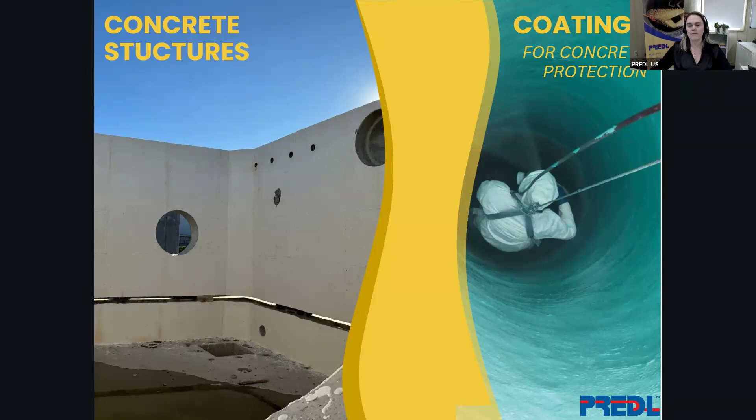There's plenty of evidence to show that in just a few years' time, bare concrete and coatings can and often fail. It's important to recognize that corrosion in these structures occurs not just above the line of sewage, but also below. We have this corrosion happening in two ways: one, bacterial hydrogen sulfide, and then the other, sulfuric acid. This process, as I'm sure a lot of you are familiar with, is often referred to as microbial induced corrosion, or MIC.

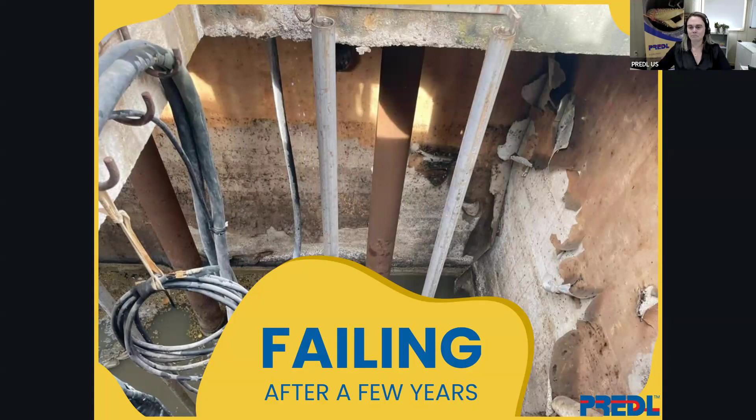MIC is a process in which sulfates in the sewage are altered by bacteria, causing the formation of hydrogen sulfide, and we're all familiar with that rotten egg kind of smell. Once this has happened, the sulfur is further oxidized and it eventually turns into sulfuric acid. So while many coatings have exceptional corrosion resistance, it's only as good as the technician who's applying the material, and if it's not applied perfectly, you can almost guarantee failure.

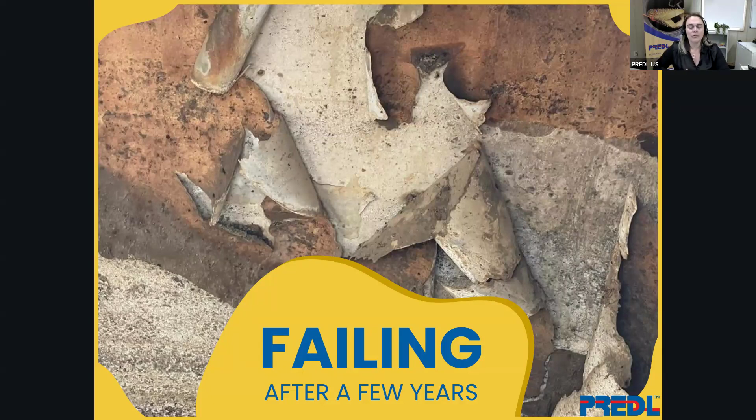In these larger structures, we find that the area in which the water level sits is often the most damaged. The issue we see is that there's this constant fluctuation in the height of the water line. So we're kind of encountering a dual attack: we've got sulfuric acid, we have hydrogen sulfide, but then we have this water level moving up and down, which is further eroding that weakened structure through the turbulence of the water movement and changes in pressure.

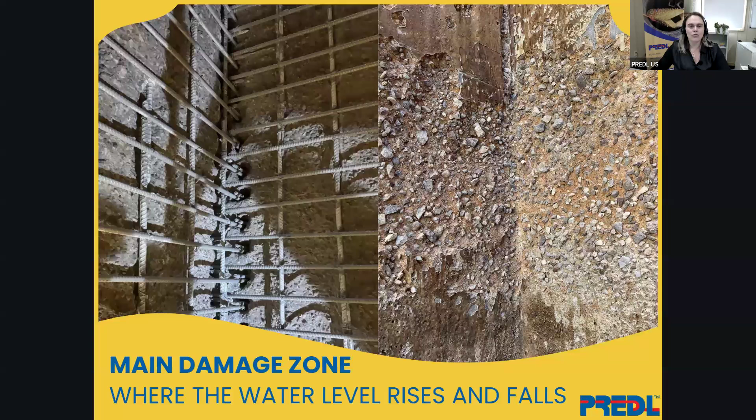So to repair this type of damage and prevent future corrosion, we really need a durable and robust rehabilitation solution.

Another situation that we see and hear of often is that people are lining only the part of the structure that they know will be exposed to the air. They feel that lining below the water level is not necessary, and that really is a mistake.

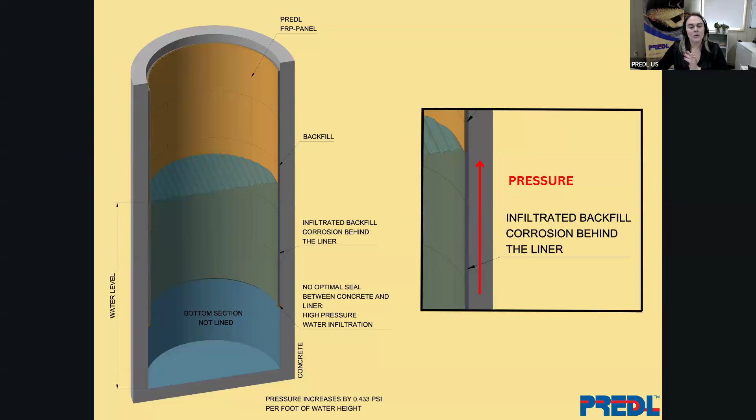If the bottom isn't lined, we can see here through this visual: if we don't have the bottom lined, we have no optimal seal between the lower edge of the liner and that structure. And with that, we can't guarantee that the lower edge of that liner will not eventually succumb to infiltration. Once that infiltration occurs, as these water levels go up and down in the structure, so does the water behind that liner, and it's leading to infiltration in that backfilled concrete.

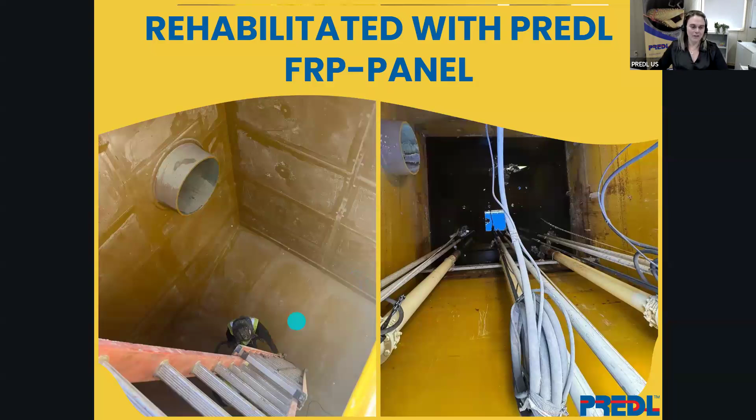So here you can see a structure that's been rehabilitated with Predl's FRP panels. Our panels are sealed from the floor all the way to the ceiling. This system is going to ensure that there are no future issues with back pressure over any lower exposed edges, because they don't exist in this system. So on the left is a structure immediately after install, and then on the right, a year later.

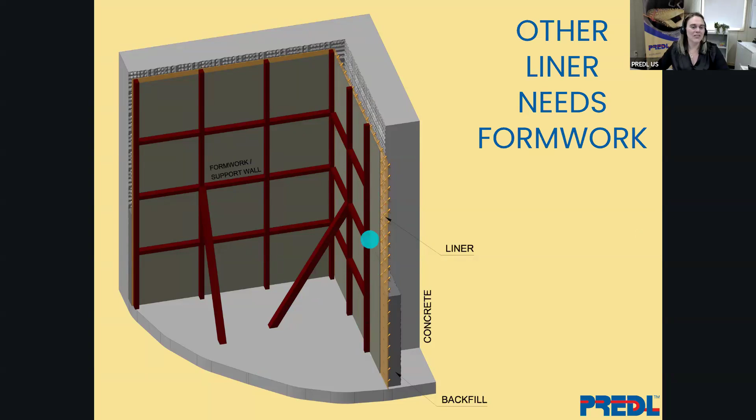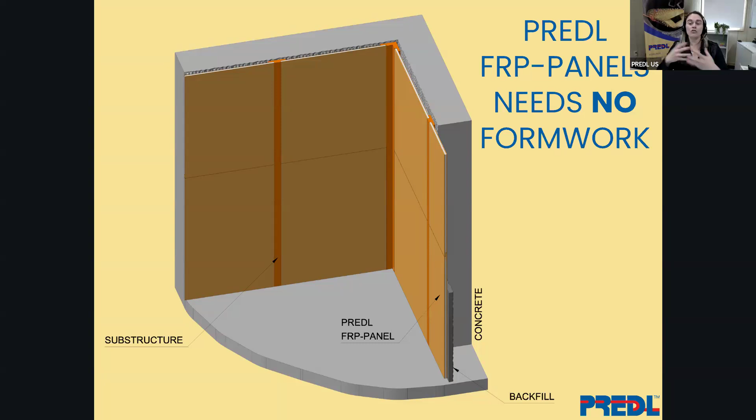So when we look at the Predl FRP panels, there's no formwork needed. Our panels used in conjunction with the substructure allows us to create a new wall using rigid panels which are self-supporting.

So now we're going to talk a bit more about the technical features of the panels. Predl has designed and manufactures our panels to each specific structure. There's no cookie cutter, one size fits all. Each panel is a 15 millimeter thick fiberglass panel. They're light in weight, but strong and structural due to this honeycomb core that you can see here. The sanded back of the panels allow for a superior mechanical bond and monolithic bond to the concrete.

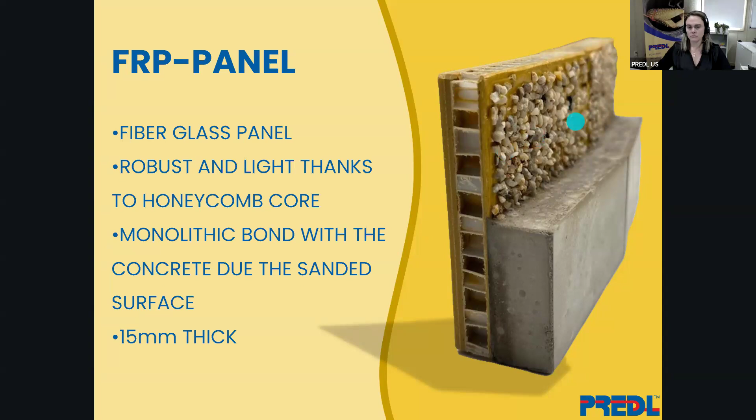So the inner layer of our panel, our wastewater side, is coated in vinyl ester resin. Vinyl ester resin is a high performance resin, meaning it's of the highest quality, and it has a broad range of chemical resistance. This resin can also tolerate higher temperatures, even those greater than 212 degrees.

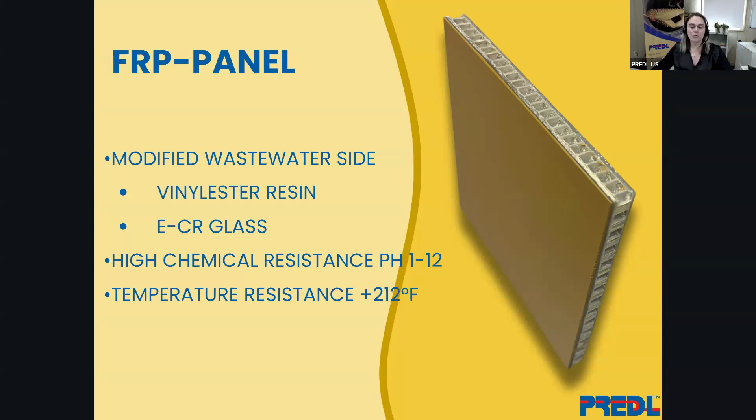Furthermore, and another very important fact, is that we use ECR glass in the manufacturing of these panels. ECR glass is also of the highest quality and corrosion resistant. I did not realize until I started doing more research that not all glass is corrosion resistant. So that just makes this a very important point to understand. If you're using regular glass in the manufacturing of these, it can potentially absorb, expand, and corrode.

Predl's FRP panels are the only ones manufactured by our proprietary process, which involves hand lamination and vacuum pressure pressing at 14 psi. This is an absolute crucial step in the manufacturing process because this is what ensures the high volume glass in the resin evenly saturates the panels. With this, it yields that high bending rigidity, which also ensures that we have no delamination of the layers. If this process is skipped, you just cannot effectively bond these various layers together.

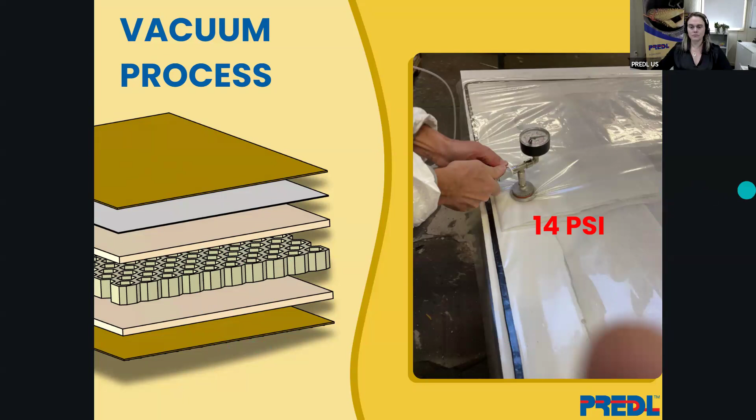Overlapping the panels is another key technical feature to how our panels are assembled. Through the process of overlapping the panels, which we can see here sort of highlighted in red where the overlaps occur, we can ensure 100% that all of the edges are secure and sealed. Our overlapping process occurs in three steps. So first, panels actually overlap with the substructure.

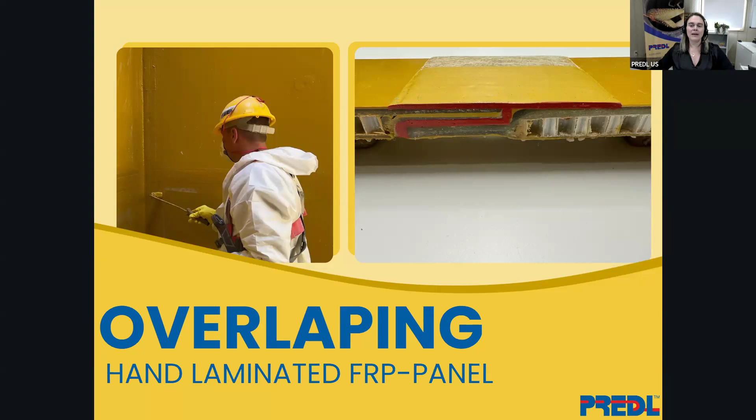And we seal in between those two overlaps with Sikaflex, which is a polyurethane sealant. From there, this is where we'd have our Sikaflex, and then we come in and utilize a fiberglass reinforced putty to fill in any gaps. And finally, we hand laminate with 3 layers of glass and finish it with the corrosion resistant top coat.

Here's another side view just to give you a better idea of how we go about that 3-point sealing system. So again, here's our substructure. We've secured it with a Hilti fastener. And then we've got our layers of Sikaflex here and here, where our panels are overlapping the substructure. And then we come in with the putty and finally the lamination.

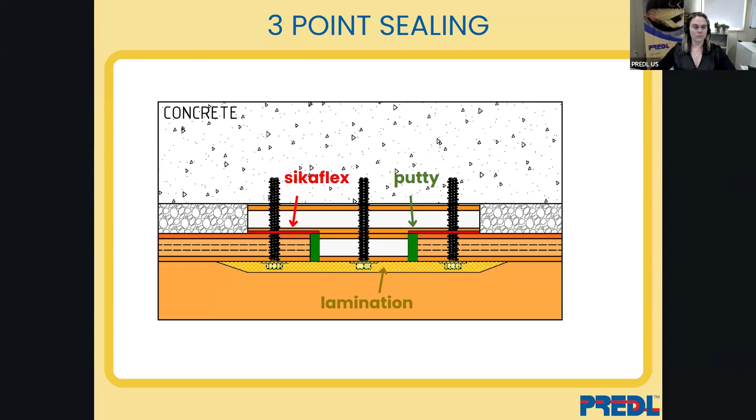Our FRP panels can be designed for straight walled structures as well as round structures. The solutions we offer are highly engineered and tailored to meet your structure's specific needs.

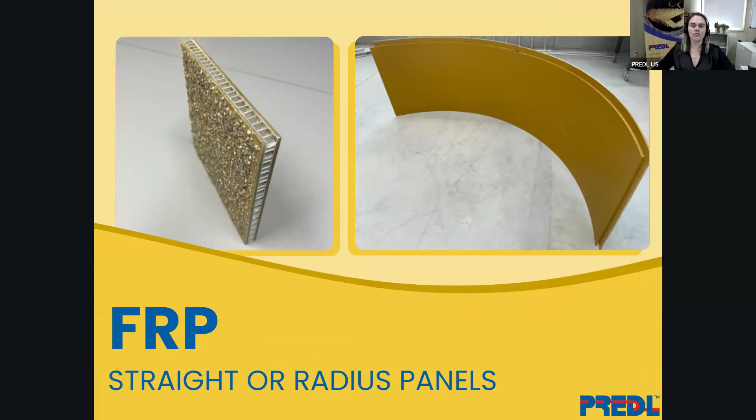So we're going to walk through the process of data preparation, design, and installation of Predl's FRP panel system, because I think this is really what's going to allow you to see that we offer not just a product, but a fully engineered solution.

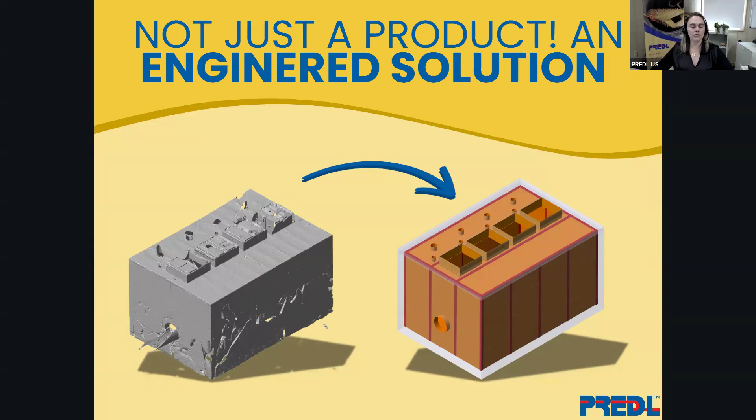As with most of our other rehab solutions, we begin by taking a 3D laser scan of the structure needing rehabilitation. We always ask that the structures be pumped down and reasonably clean because we can't scan through solids or liquids. However, we recognize in these large structures that's often not possible because these are usually in service up until the point we're ready to begin the rehab process.

So with these types of structures, we also ask for a copy of the existing structure design that we then provide to our engineers who use it in our design and evaluation process.

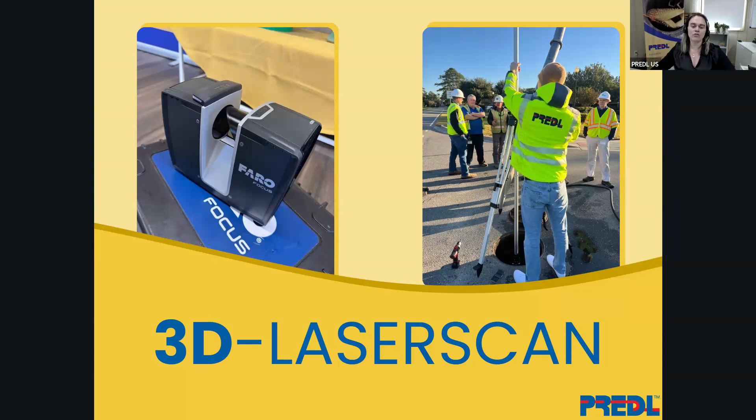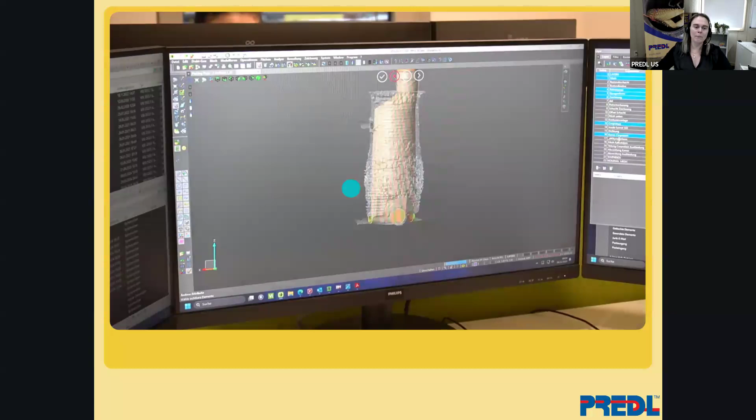So here you're able to see what our engineers create via the data from the scans. We refer to this as a mesh. It allows us to visualize all the areas of loss. In this one in particular, you can see how the original structure is bellied out. We can see where bricks are lost, where grout is lost. I realize that this is a manhole, not a large structure, but it just served as a great visual.

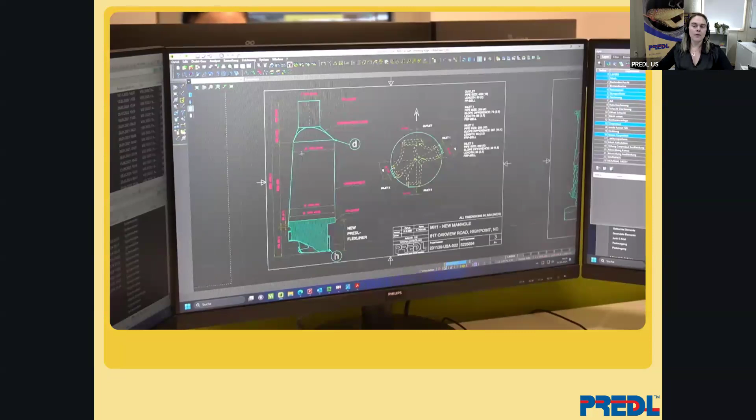So with this, we can evaluate the condition inside, but also obtain the precise measurements we need throughout. From this mesh, we can then design the liner that's required for that specific structure.

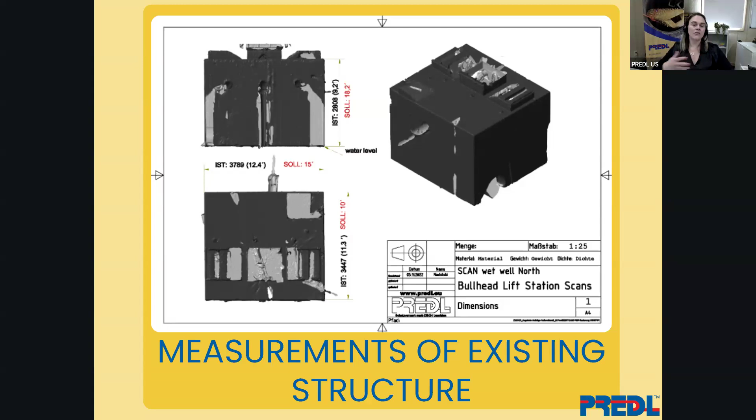So not only do we use these scans to prepare the design of the rehab panel or liner system, this also allows us to evaluate the integrity of the structure itself. We always want to be able to make a recommendation as to the safety of sending a crew in that structure to begin working.

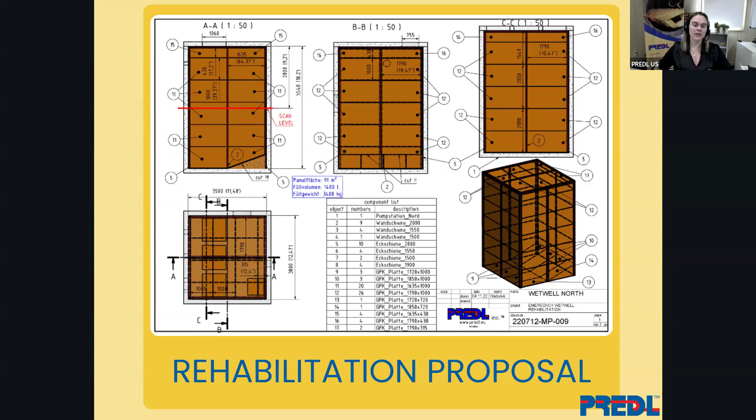So once we've got the design complete, we'll provide a rehabilitation proposal. And with this proposal comes our recommendation on the design of the panels and how those panels would be constructed. These blueprints are an easy to read and follow process, and it's all pretty straightforward.

Here are just a few more detailed views of other aspects of the installation. Here we address how to connect where the pipe connections are, doing the connections up top, attaching the liner to the flat top.

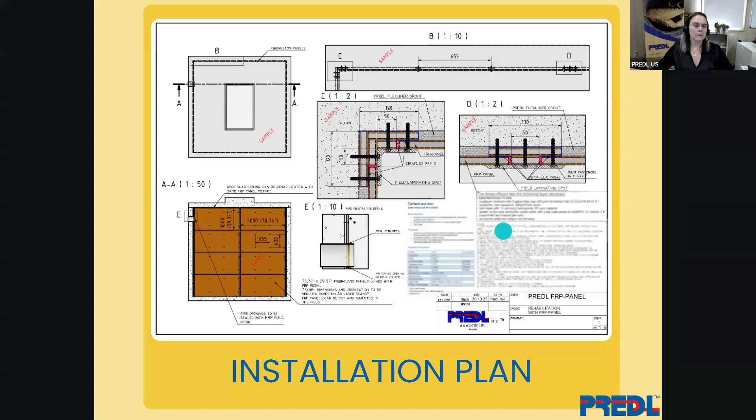So once the design is complete and we're ready to move forward on the project, construction begins. Once we have everything prepared for that project, everything will be direct shipped to the job site.

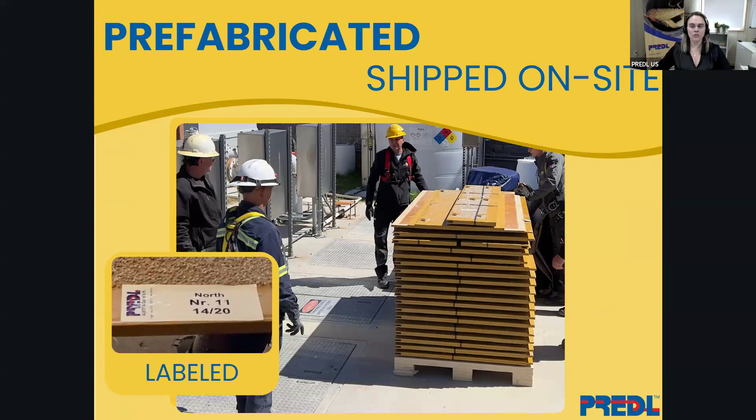All the panels are going to have a label that identifies the project name, number, and the panel number. And these numbers will correspond with those blueprints we provided. This helps to make sure that everything is properly and easily placed during the installation process.

In cases of severe corrosion, we may need to start the process in the structure by leveling the bottom. Unfortunately, we often won't know until we get there to start because, as stated before, a lot of times these are in service up until time of installation.

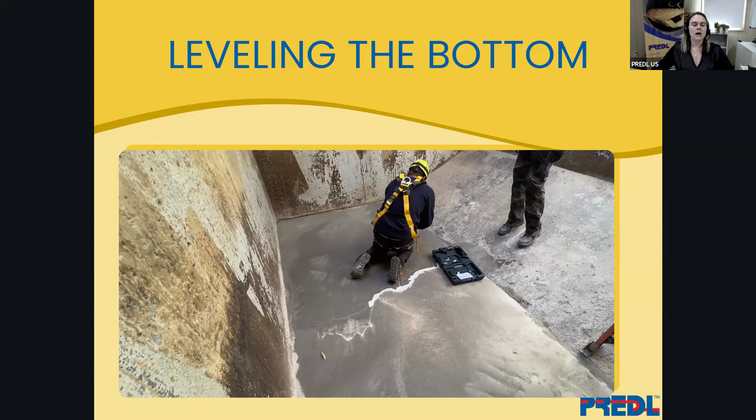But our flex grout is a great solution for this. With our flex grout, which I'll talk about more in a little bit, it's highly flowable. It flows like water. It's self-leveling and it has a rapid set time. So if we do need to level out this bottom, it's a quick and easy process.

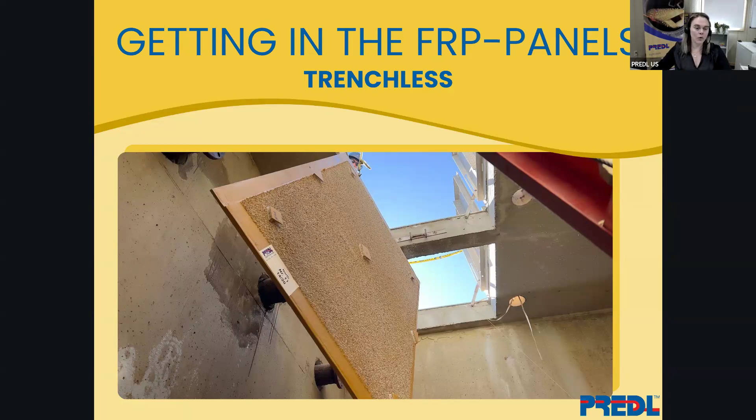Our panels are easily lowered through the opening of the structure. So if we know that we're designing these panels for a structure that will not have that lid removed or replaced, we're going to ensure that they can fit through whatever hatch or opening we have available to us.

So before we start to put the panels up, we're going to install or fasten the substructure. You can see portions of it going up here. This substructure helps to ensure that we have proper spacing and it aids in the overlap of all of these joints. Again, that 3-point overlap and securing is extremely important in the application of these panels.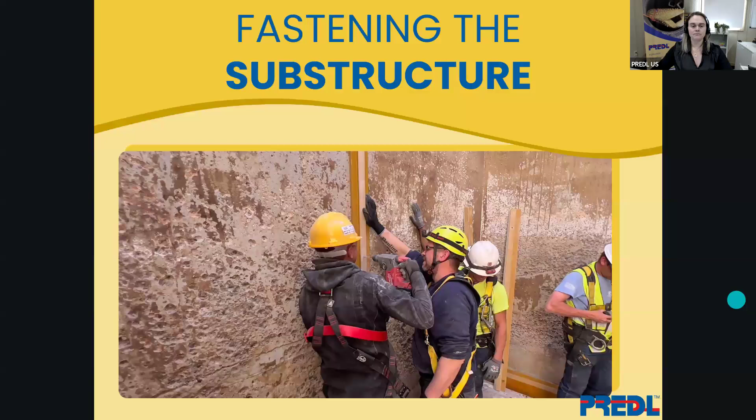With this, we're going to work from the bottom up, just like most other projects. With the installation of these panels, we're going to install one level. One level is typically one row. Once that row is in, we're going to backfill with grout.

And here you can just better see how we're affixing the panel to the substructure, utilizing the stainless steel Hilti fasteners. Another important point is that we do pre-drill the spots where you're going to need to fasten these panels.

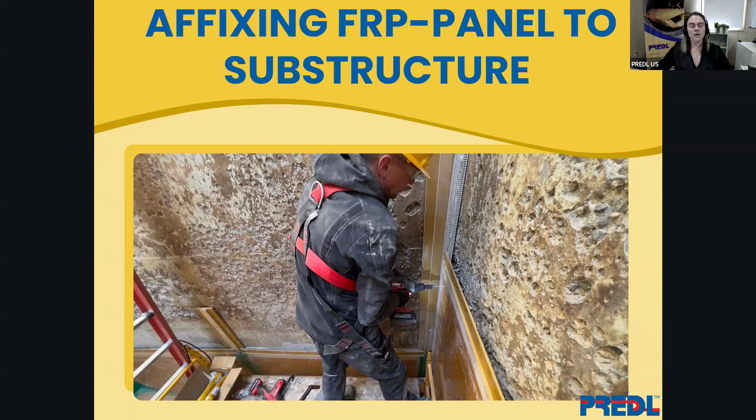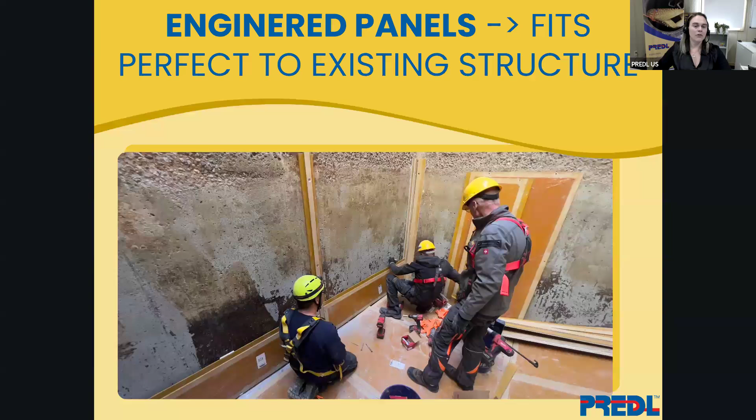Because of this engineered process and the substructure provided, it allows for a smooth installation because your elements are fitting together perfectly. It goes together much like a Lego design.

Here you can see two aspects of joint sealing. In this corner, we're applying the Sikaflex, that polyurethane adhesive, between our substructure and our panel. After that's been completed and fastened with the Hiltis, we come back and close up that seam with the fiberglass reinforced putty.

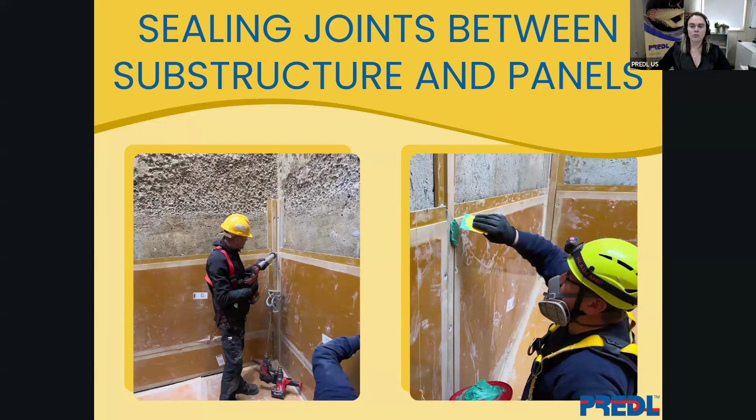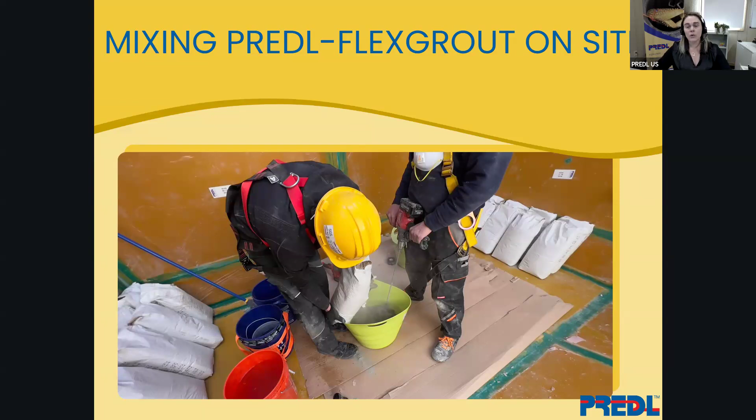Now that we've closed the seams of that row, we begin mixing the flex grout. We do this on site. While the flex grout is not required, we do highly recommend using it.

Here you can see we've got a very narrow space to backfill with the grout. We want to maintain a quick pace, so utilizing a grout that has a quick set time and high flowability allows us to keep moving along, but it also helps ensure that as we're backfilling, we're not creating any voids between the liner and the existing structure. This highly flowable grout fills into all the available space.

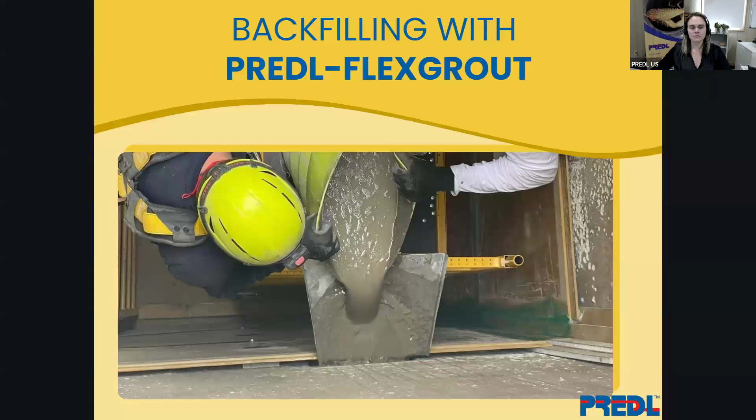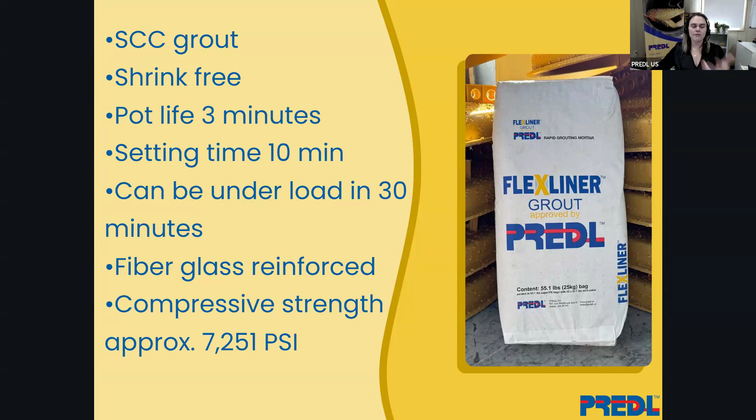Just real quick on the flex grout: it's an SCC grout. It is shrink free. The pot life is only 3 minutes, so you have to really work fast and maintain a quick pace, otherwise it becomes too thick to pour. It has a set time of 10 minutes and can be under load in as few as 30 minutes. There is some corrosion resistance built into this grout, it's fiberglass reinforced, and the fully cured PSI is over 7,200.

And here you can see what it looks like when we're backfilling with this grout. Again, it really is pouring like water.

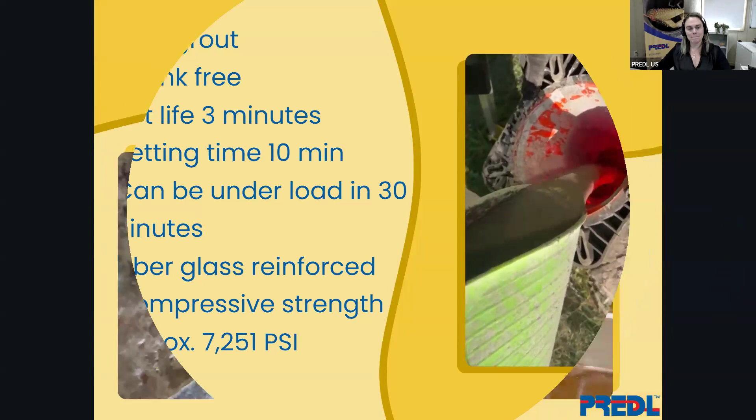Here is a section that's been backfilled and just set. We've got the self-leveled grout up to the upper edge of the panel, our substructure in the background, and then you can see where we've got the fiber reinforced putty filling in those small gaps.

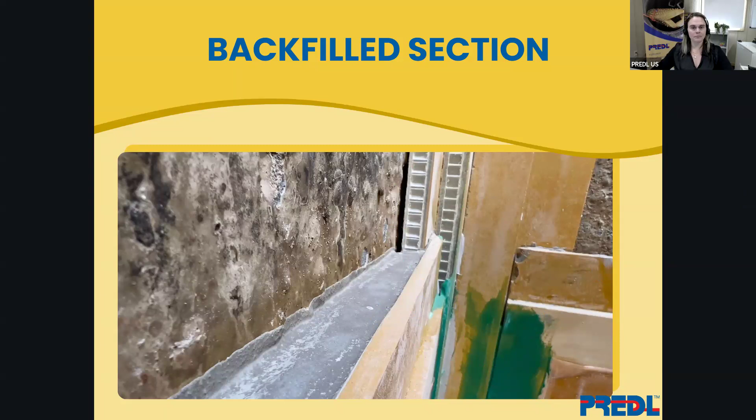Management of pipe connections with any installation is not a problem at all. We make sure we have the pre-cut holes in the panels, and we prepare any prefabricated parts you may need to manage those connections, which will be provided to you on site.

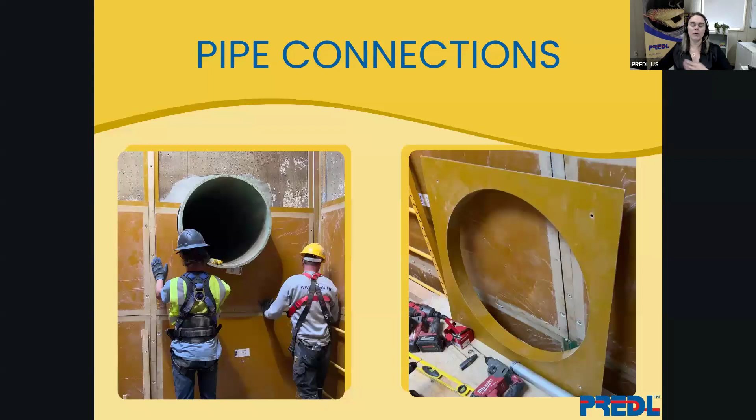Once the panels have been installed around the pipe, we backfill as usual, fill that in with grout, and then it's easy enough to rough up the pipe. We actually laminate the panel to the pipe to ensure we have that good gas-tight and watertight connection.

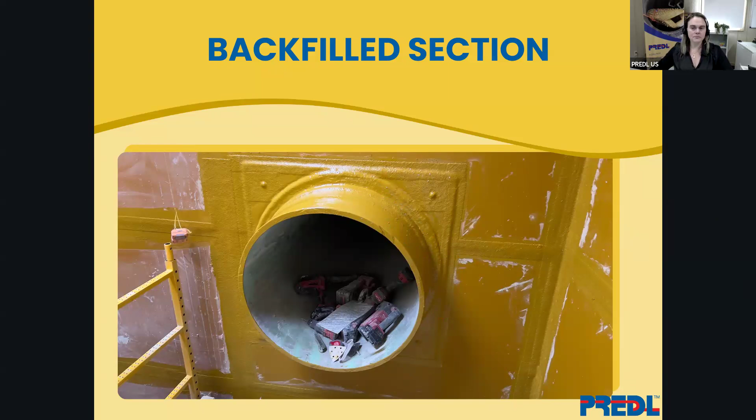Just another visual showing how we work in sections. This would have been section 1, installed and backfilled. On to section 2, all the way around, installed and backfilled, and we continue working our way up.

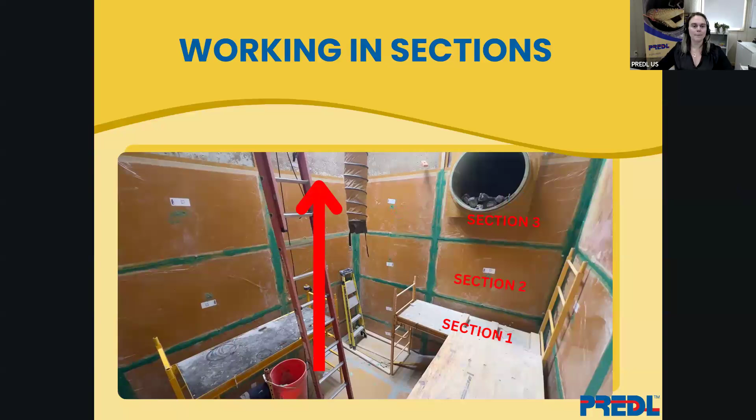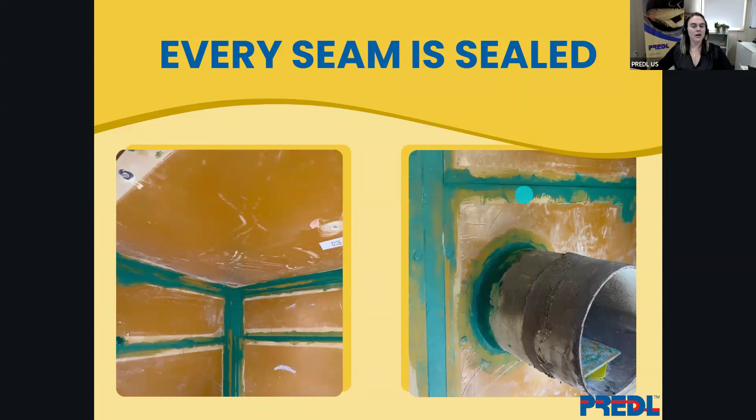Here you can see where, again, we're filling in every seam with that fiberglass reinforced putty, both at the ceiling and around the pipe connections, not just in between the panel joints.

Here, doing that final layer of lamination across all seams. And also, this is a great visual to show how we would seal off at that hatch opening if we were not replacing the top.

We finish with a top coat that has a chemical resistant resin in it, and that's also what has the pigment in it to match the panels. So that's why we no longer see the green everywhere.

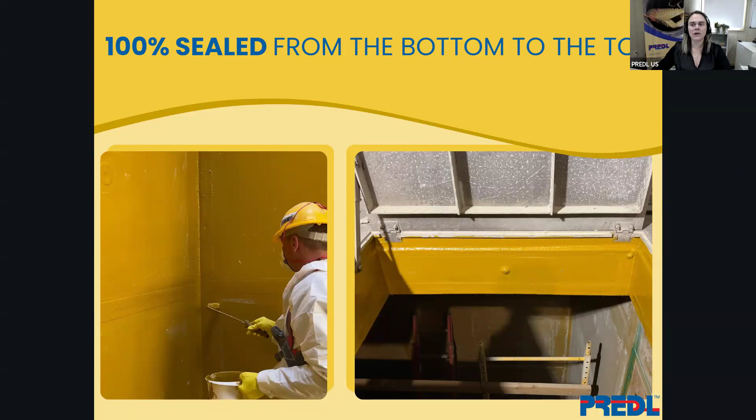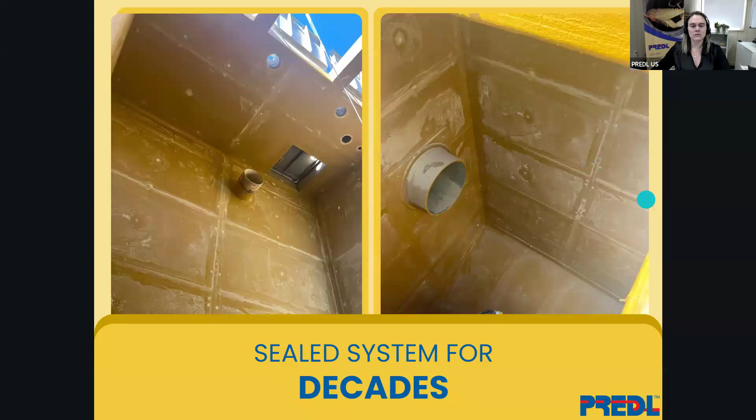And with that, you now have a sealed system that's ready to go for decades to come. We've got the ceiling, the side view, and again, the structure one year after service.

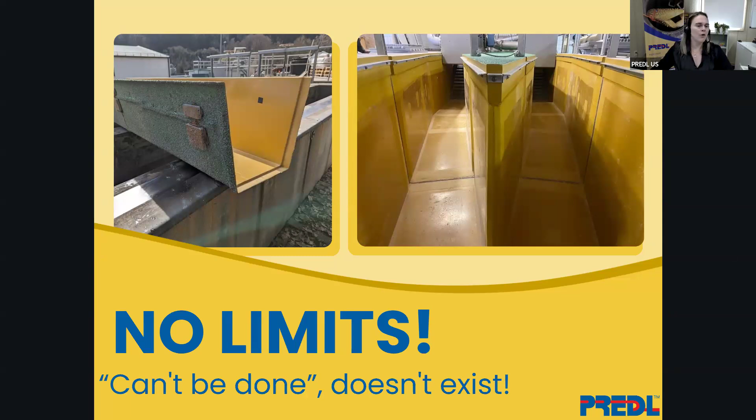Not only do we offer our traditional FRP panels for the straight walled structure or the radius structure, we can do them in flumes and all sorts of shapes and sizes. These are a few projects that were actually done in Germany.

Often, precision is key. We will come in and do the laser scan to ensure that when we come in with these flumes, we've got a perfect fit.

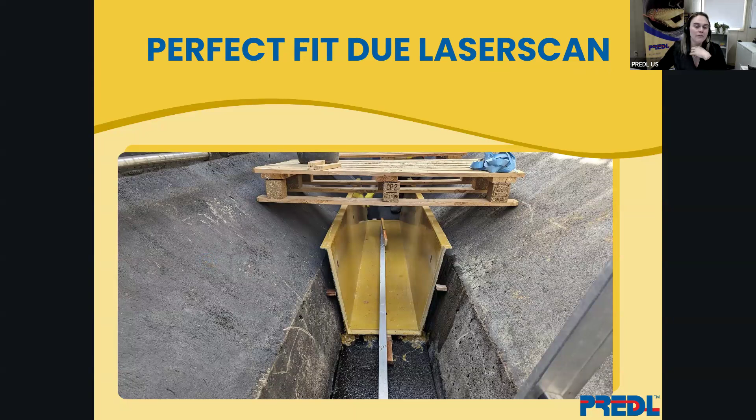They've had some interesting projects for sure. This one was unique in that it was in a pump station, and there was a shovel that would run up and down this flume to collect solids. That shovel only had a few millimeters between itself and the flume.

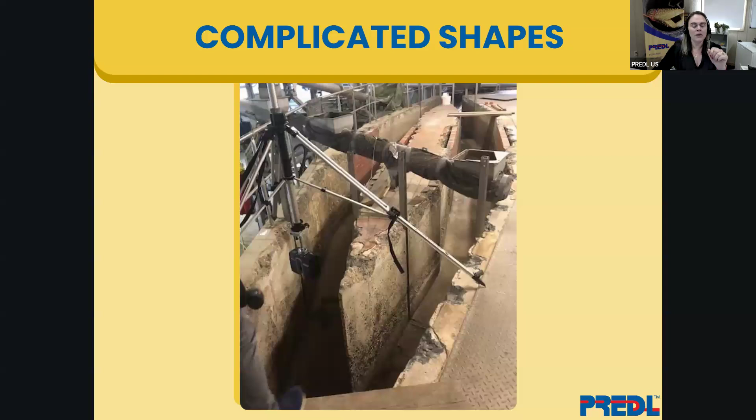So for this, we had to create really thin panels. We did them without the honeycomb core, and this is the completed structure.

So again, it's not a one size fits all. We are excited to look at whatever your project is and see what we can come up with to meet your needs.

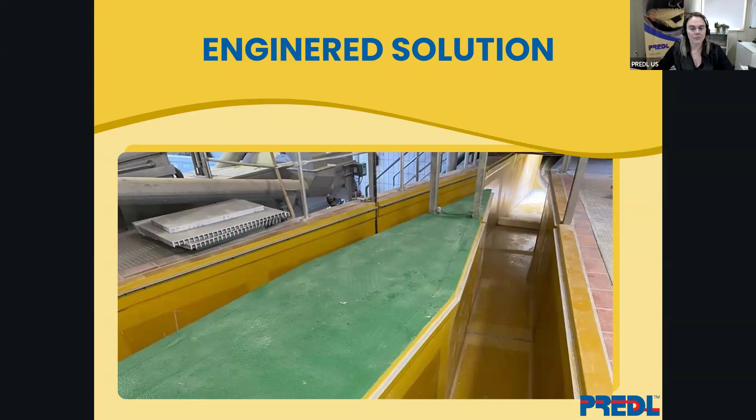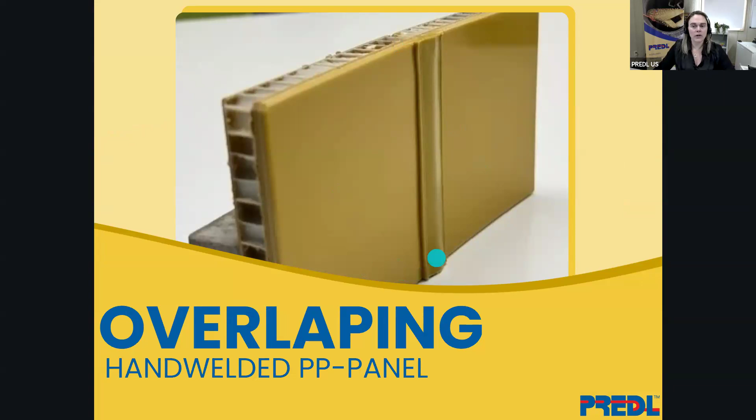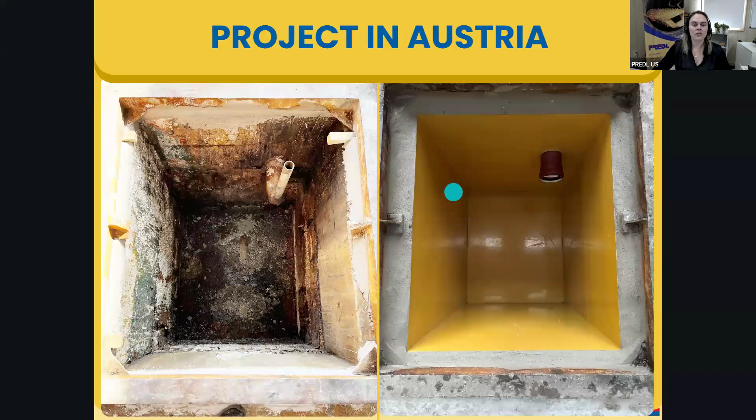Our honeycomb panels are also available with polypropylene lining. With these PP panels, they are sealed with an overlapping extrusion weld along the joints, making installation easier. We typically recommend those for small box structures where a single wall can be one panel. In this case, this was a project in Austria, a small box. Each wall and the floor is an individual panel, and we just have a single weld sealing up all these seams.

Finally, our polypropylene CorProtect material. It is a non-structural liner, but it's still a great option when we have something less than 10 feet in diameter.

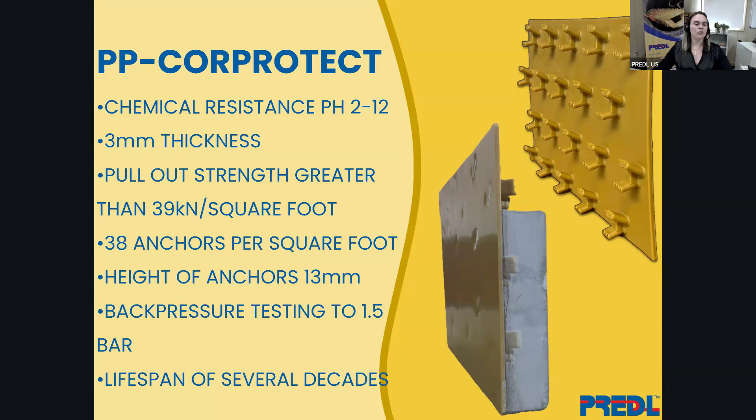The PP CorProtect material is a copolymer polypropylene, a 3 millimeter thick liner with chemical resistance from a pH of 2 to 12. It has great pull-out strength, testing over 1,000 newtons per anchor, and has been back pressure tested to 1.5 bar. The anchors are placed at 38 per square foot and are 13 millimeters high to help ensure a great bond to the concrete. Because of its corrosion resistance, it has a lifespan of several decades.

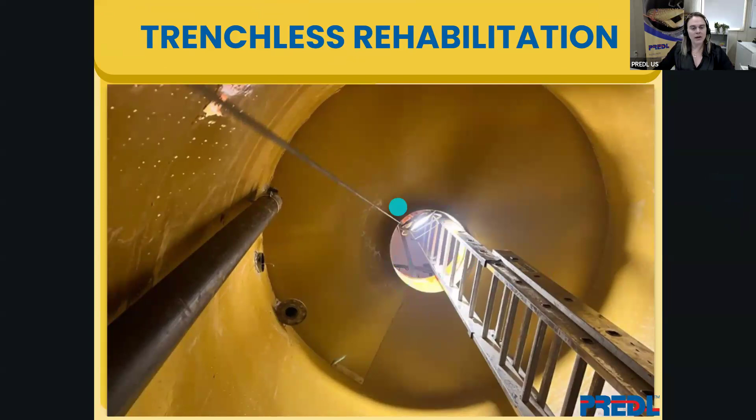This was another project out of Germany, a pumping station located in somebody's small house. It was imperative that this rehab happen fully trenchless, with absolutely no disruption to the surrounding area, because we were literally working inside somebody's house.

Another project utilizing the Core Protect liner. This highlights a bit better how we go about supporting that liner to ensure it holds its shape while we're backfilling.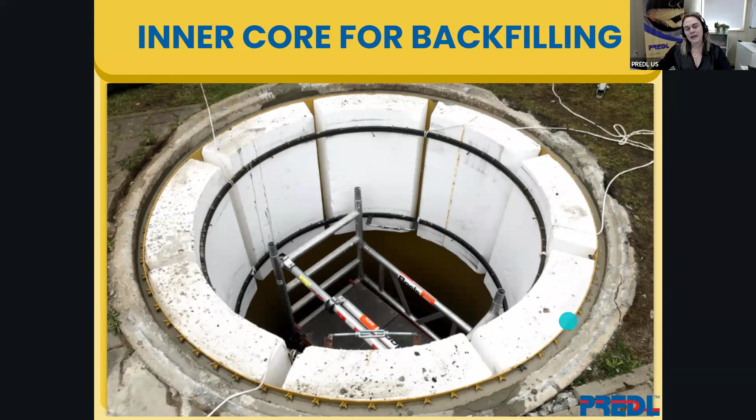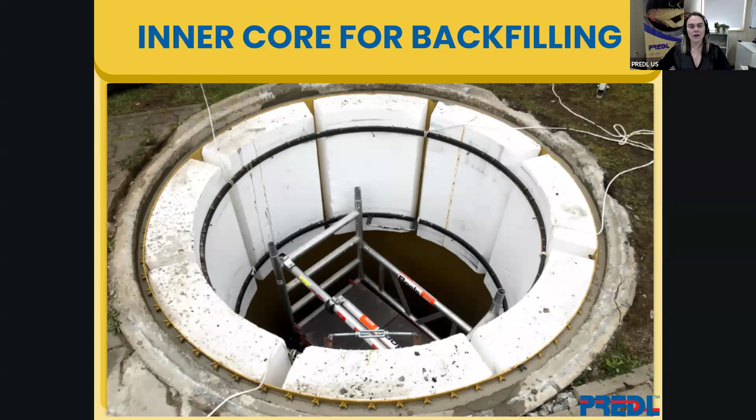In this case, they were replacing the flat top. Here we can see better: we've got the EPS blocks that we cut and provide, as well as the expanding rings we provide. You can see the anchors from the liner and the grout coming up to the edge. So it's just liner, support, backfill with grout, completed structure. In this case, they were able to do this rehab in just a couple of hours.

Because the flat top was being replaced, we were able to provide the precaster the manufactured flat top liner. He cast it in and ensured we had that on the job site to place on top of the structure once we were done.

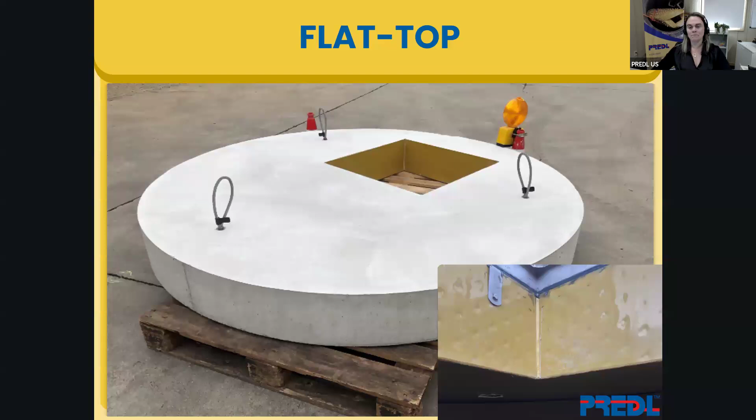That concludes our presentation on Predl's large wastewater structure rehabilitation. I'd like to thank you so much again for your time and participation today.